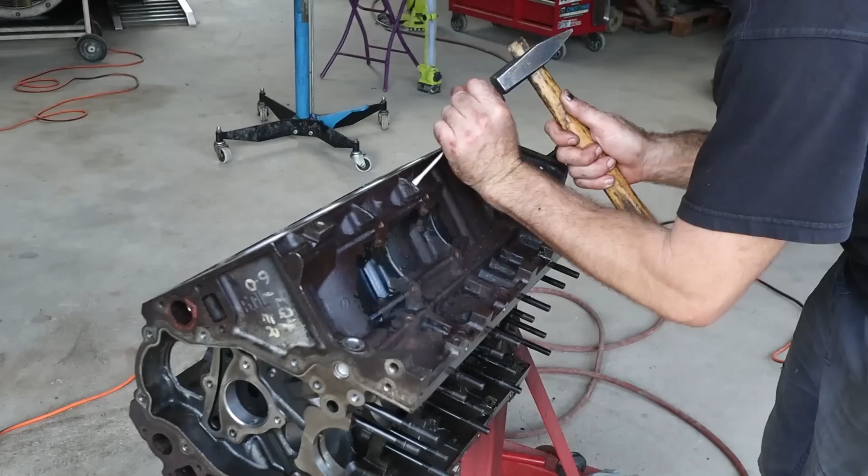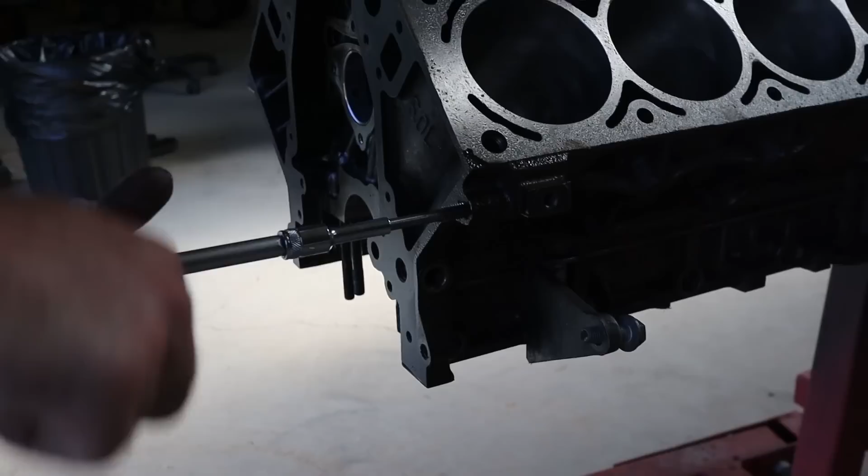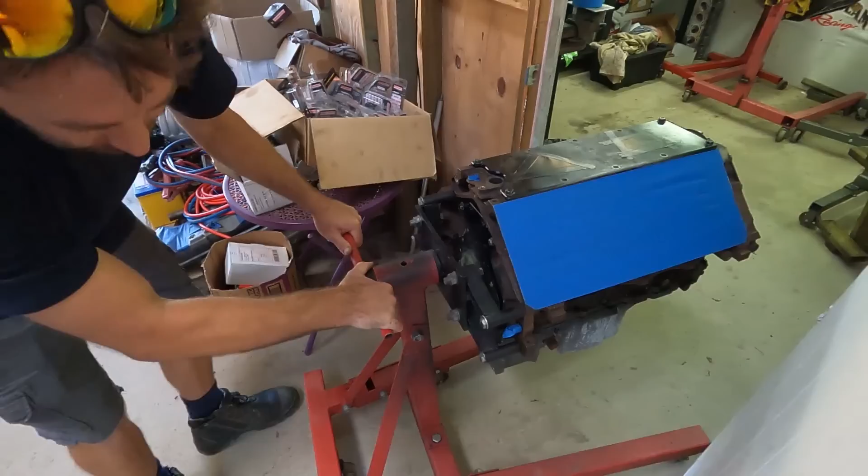Another iron block. Iron blockers. This one's destined eventually for some nitrous, maybe, some giggle gas.

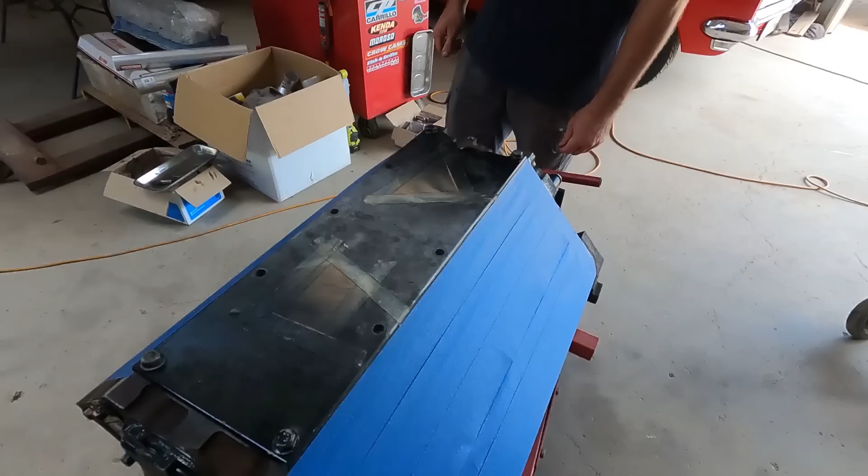Either way, to start with, this one's going to be like, what do we work out? 12.5-ish, high 12-ish to 1 compression. Big coat. 6 litre thing, be on E85, so it should make some pretty decent grunt. And it's got a monstrous cam for it.

Righto guys, welcome to our latest little build series. So this one, owner has a VX Clubsport. Yeah, I believe so. Yeah.

So VX Clubby, and he bought us just his engine, pulled down in parts, all of the parts he had set aside for this engine that he was going to build for this car, and he basically just wanted what he wanted. Now he already supplied a crank, rods and pistons.

They were Manly rods and pistons, crank. Eagle crank and rods, they're I-beam. Eagle I-beam rods, and it was Mahle pistons. So it's all stuff that we wouldn't normally pick or choose as our first preference to build an engine, and just LS1 block that came out of the car.

So what he wanted was pretty angry, big cammed LS nitrous on E85, and for what he wanted to do, the pistons that he had weren't really high enough compression to, as you guys know, we've harped on about it all the time, with E85 and LS in aspirated situations, it's not a huge advantage, and you don't get huge power gains because there's only so much compression you can get, well, in stock LS there's only so much compression you can get into them without upgrading pistons. So to go E85 and get any decent gains, you really need a really high compression.

But that was only problem number one. We actually sent the block down to start getting machined for all this stuff, and what had happened is the engine had let go at some point, and the rod had smashed the bottom of a bore and cracked the liner. So the block was sort of no good. It had to get new liners and stuff anyway. It was not the best thing for us to be using for a customer build.

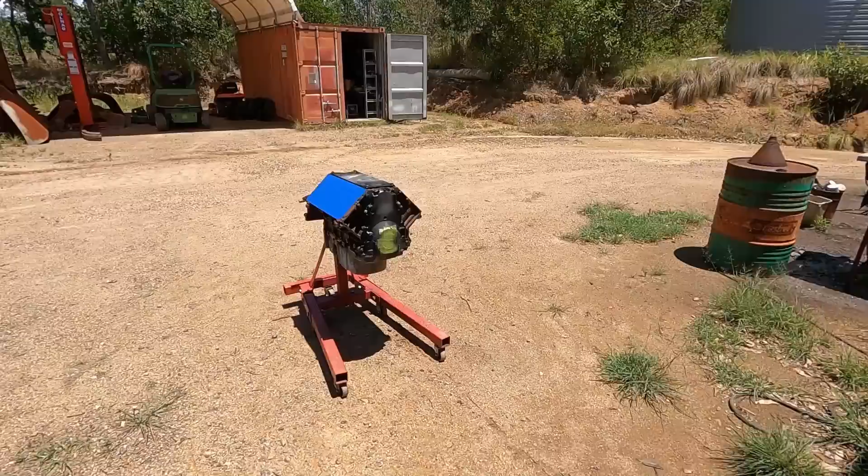Anyway, as you can see, Rex has got this block masked up and we're going to paint it up. First things first, paint her up.

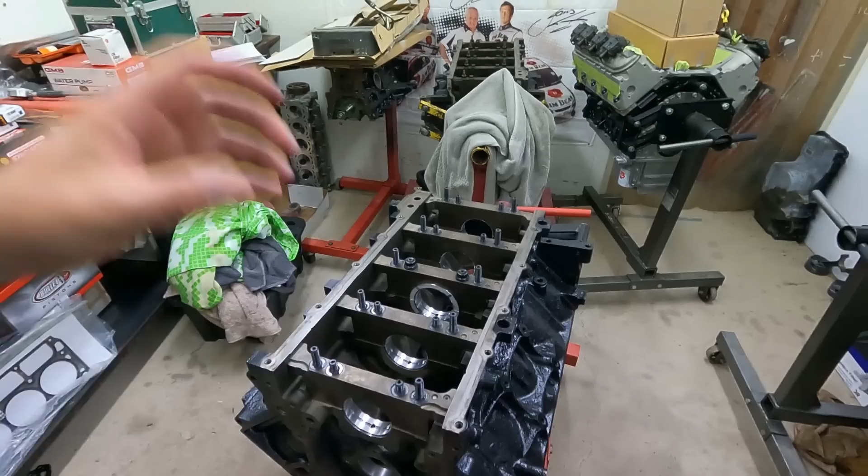Righto guys, Rex is cracking along with this engine, just getting the bearing clearances and everything else sorted. Interestingly enough, a lot of these came in a little too tight, so we've had to order some oversized bearings. A lot of bearing manufacturers make an oversize, one thou over, which is designed for high RPM, high performance engines. So we're going to have to get a set of those just because the standard size bearings come in a little too tight.

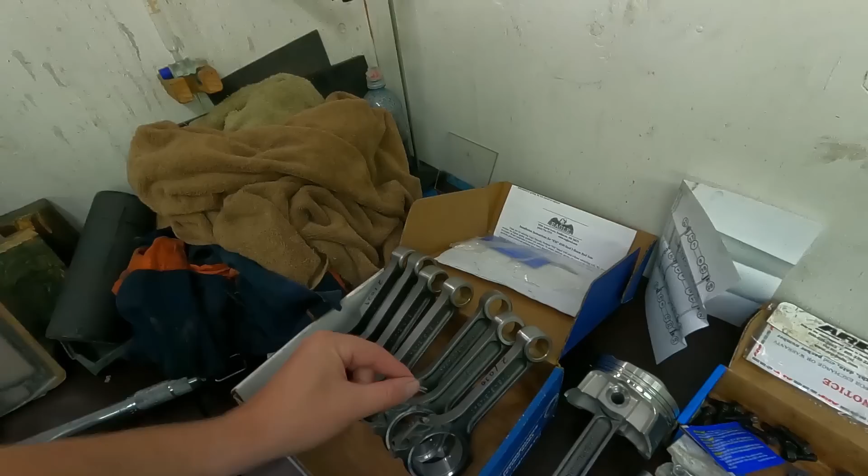So we've got our Eagle crank, Eagle rods. We've compared these Eagle rods to standard Gen 4 LS rods and they're almost identical - so similar, but you obviously have the advantage of huge screw caps, with ARP hardware, which you don't get with the LS rods, and you can't really use properly on an LS rod because they're a cracked cap. If you upgrade to ARP hardware, to be right you should be resizing the rod to suit the extra clamping force, but because they're a cracked cap you can't resize the rods. So it's a bit of a gray area - a lot of people just do it anyway, they whack ARP hardware in them. But to be right in the proper sense, you're supposed to resize the rod, and you can't. Anyway, they're a really nice rod. That said, they look identical to a Gen 4 LS rod, but they could be a bit thicker through the center of the I-beam. Either way, honestly not a bad rod for the money. Yeah, not bad at all.

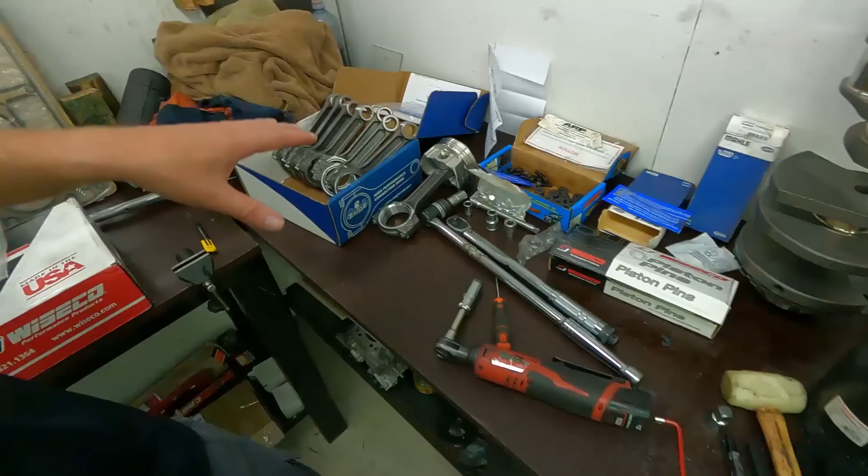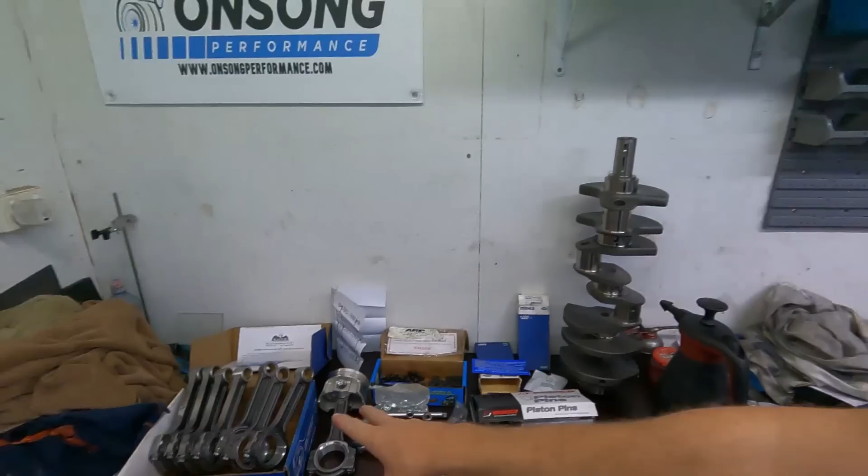These Wiseco pistons are actually quite nice, real nice. We ordered these to suit the compression we wanted in this engine, because we were going 6 litre. So the 5.7 pistons that were supplied are now going to be spares. Happy days, just waiting for new bearings to get in now, and then it can start going together. I think Rex will move on to ring gaps now. But apart from what you can see here - Gen 3 iron, Eagle rods, Eagle crank, Wiseco pistons, ARP hardware - yeah, all coming along sweet.

Everything's coming up Milhouse. So I'll just go through with you the cam that's going in this thing, because it is freaking monstrous. It's gonna be awesome.

Even though we've got these massive valve reliefs, Rex is still going to do a piston to valve check, because yeah, the valve reliefs are quite big, but with the size of this cam, we're still going to do some piston to valve checks. It's a real shame we couldn't get CNC ported heads for this engine, because I reckon they would have gone really well.

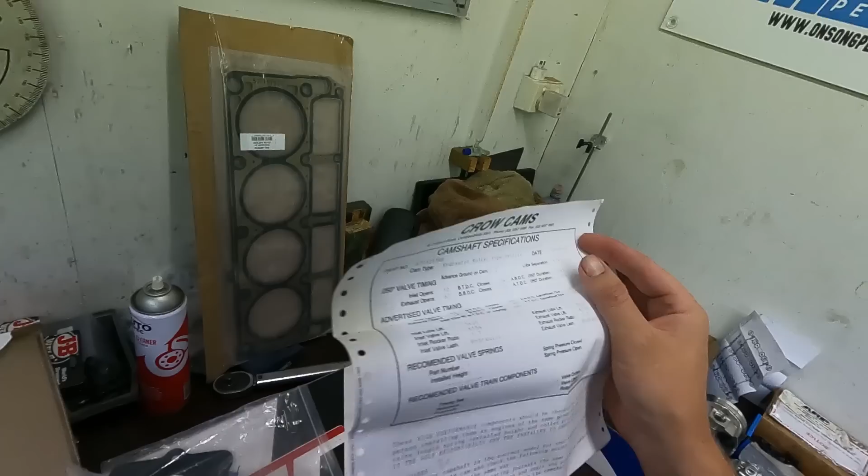But if you look down here at the cam, it's actually a Crow Cams 1253. Quite large. I'll show you the cam card. Let's have a look, eh? All right, Crow Cams 1253. So at 50 thou we've got 245, 262. It's on a 114 lobe separation, and for lift we've got 615 and 615 with our standard 1.7 ratio LS rockers. So yeah, quite an angry camshaft, big cam.

So Rex actually worked out that with that cam, the dynamic compression ends up coming down to like 8-point-something. So with this cam and these pistons, even though the static compression is going to be big - I can't even remember what we worked out - you could probably still run this engine on 98, because of this cam being so large and the dynamic compression being so low with it. But anyway, that doesn't matter because it's going on dedicated E85. That's why we went for so much compression. This thing's going to be monstrous.

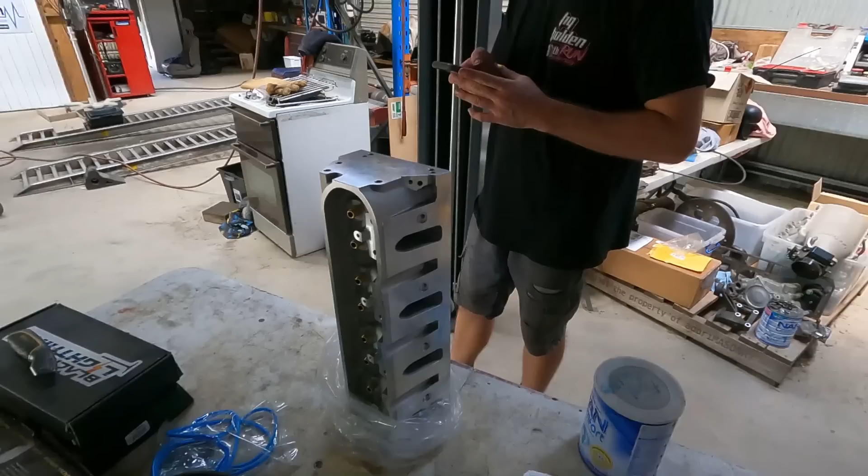So as well as that engine combination with this cam, it's going to have a Holley high-rise forward facing intake. I'll show you - these are his heads that I was talking about. Rex is just having a look now.

So yeah, they're aftermarket castings. They have no casting numbers, as you can see. So they're brand spanking new.

And yeah, unfortunately the guys down there at Tremaniac at Next Gen Engineering weren't comfortable running their CNC program through the heads, because they don't know how much meat they have on the port walls, which is completely fair enough. We totally understand that - it's not worth the risk of damaging the heads.

So what we've got is CalFlow Performance heads. They're meant to be the equivalent of a 243, which as we know flows a little bit better than a 241 does anyway. It would have been nice to have them CNC'd, but what do you do?

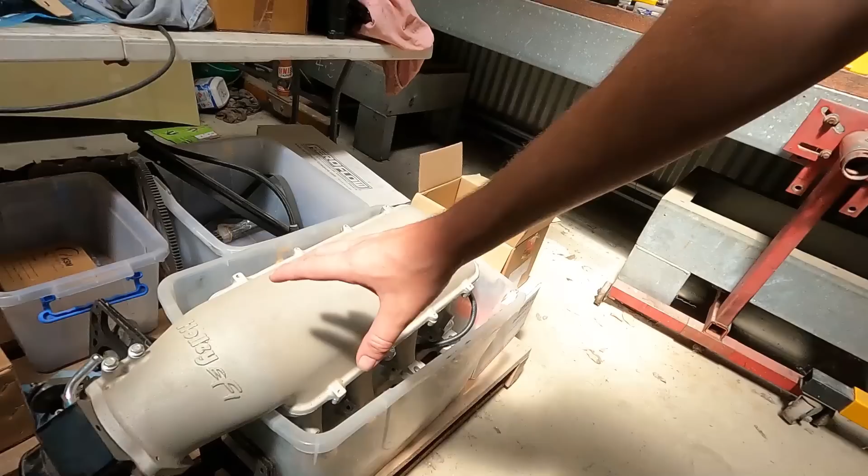So this is a Holley high-rise intake manifold. And yeah, these things are going to be sending a lot of 4L60s to the grave, I tell you that much. Plenty of 4L60s are going to get broken, so we'll see how long that lasts before he wants to go turbo 400.

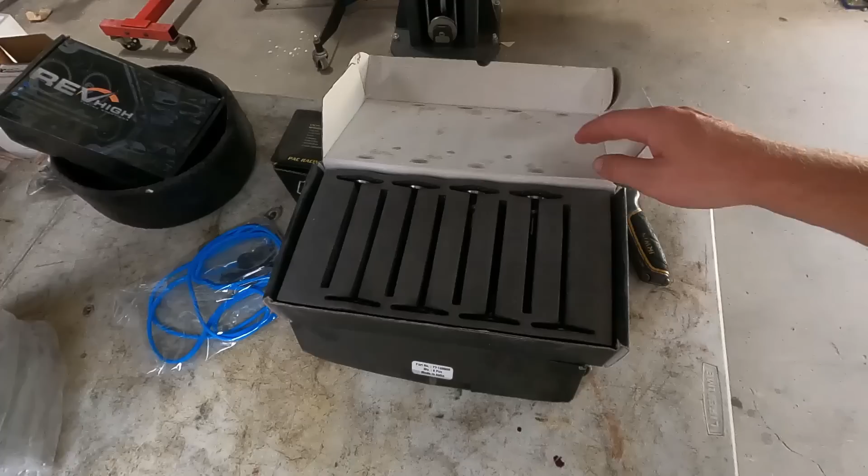So these are the valves that he supplied, which I don't know - we may end up doing like a 3-angle valve job on at the very least. But yeah, brand new valves there.

All right guys, cracking along here - see the heads are all cleaned up at the moment for now. We thought we had some more Prussian blue, but we've run out, so we're waiting for some of that to get here on Friday so we can check the contact on the valve and then do a 30-degree back cut or back grind on the intake valve. So we'll wait until that gets here to do that. Rex has just been doing some other clearancing and things like that while we wait.

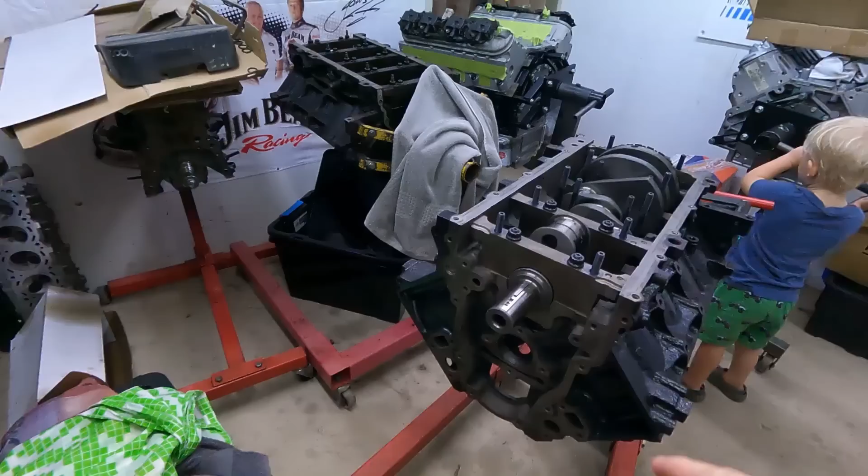Rex has degreed the cam in - it degreed in fine. He also did piston to valve checks, and yeah, plenty of clearance, a lot more than we had thought. Obviously with this monstrous cam, even though we had valve reliefs in the pistons, it was a better idea to check it anyway.

Sorry I wasn't here to actually film the process of those things happening. If anyone would like to know more about how we do that, there are multiple videos on the channel of how that process goes - a lot of engines that we actually fly cut to suit big cams on stock pistons. So if you want to go watch those videos, you'll get a really good idea of exactly how we do our piston to valve checks and everything else.

But anyway, this is all looking good. It should pretty much be at a point by the time our bearings get here that we need to finish doing the main clearances that are a bit tight with the new bearing shells, and just start assembling the whole thing. So, yee-haw, what do you reckon, Flynn?

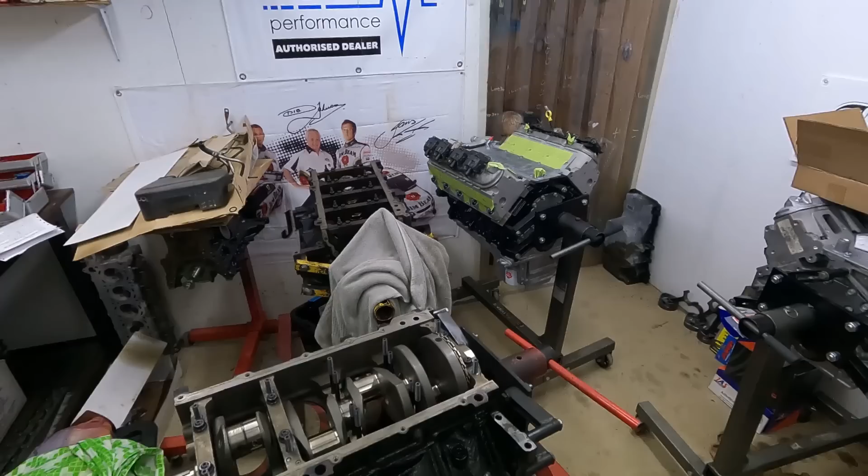Good job? Yeah, good job.

So what are you doing here? Washing stuff. Why, just like a dishwasher or something? Yeah, I just miss being home. That's what we need for the show. We need a dishwasher, chuck all the pistons in a dishwasher. Pistons, rods, cranks, the budget hot wash. Chuck the block in there. Yeah, pull all the shells out, chuck the block in.

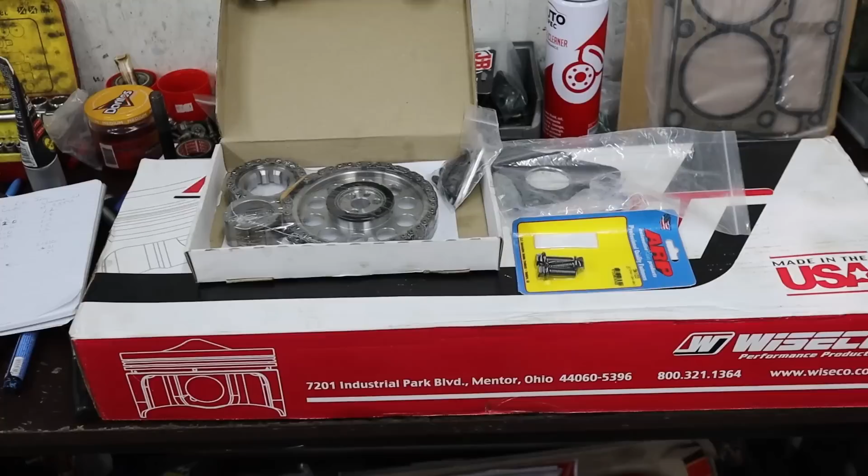What if I told you the thrill of running a red light, chasing a recent bright memory through a bent pipe? When you get older, some just wanna hang five with the rest of a soldier on, sleeping on the tram line. What's the point if we can't escape the landmine? Sand slides faster each day, one day we can die. We'll just ignore it, let the revs chant. I burn laps around the sun for face first to the campfire.

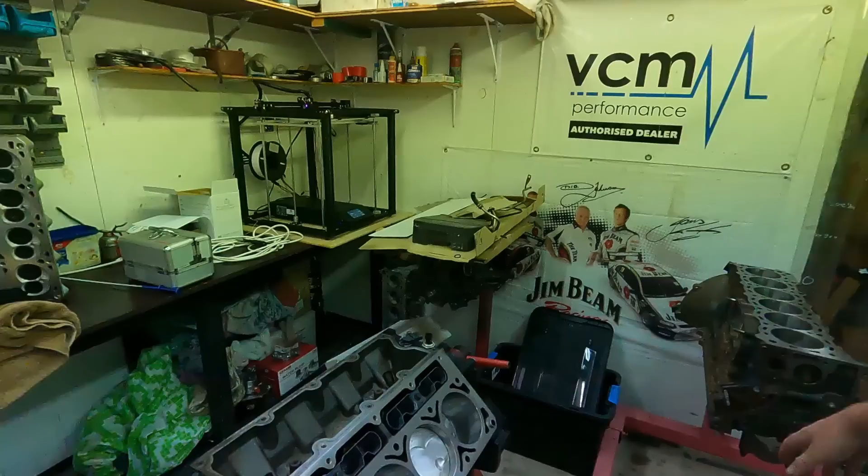Righto guys, still just working through getting this engine together, getting these heads together. We're not particularly that impressed with these heads. You can see where that spark plug actually ends up, that's actually in the head. So Rex has just put that in there so he can see a chamber, figure out what the chamber actually is so we can calculate the compression of this thing. Yeah, there's a lot of things about this head we're not particularly stoked on, so keep that in mind for this engine.

At the moment, obviously the customer just wants to get it together with what's here and get it in the car and get it running. But yeah, in future if he wants to do any upgrades, that's going to be the first thing we're going to be looking at, is swap out these aftermarket heads for a pair of CNC ported 243s or 799s or something. So that'll be the plan.

Righto guys, so engine is more or less together.

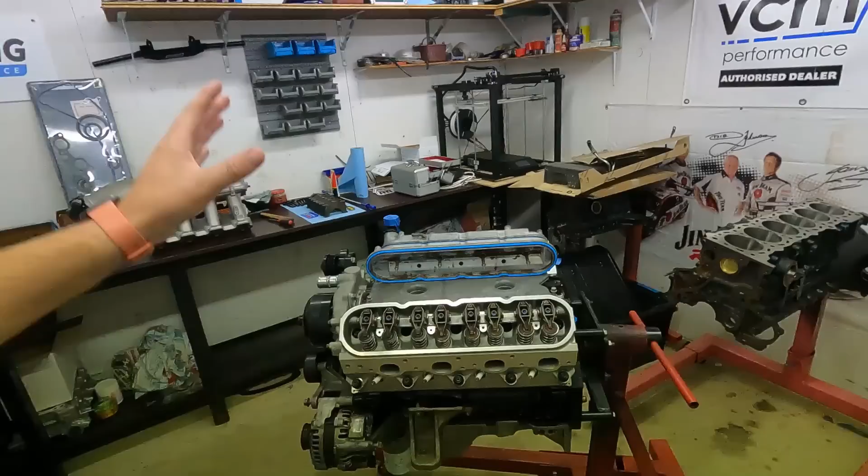I just thought I'd rip this cover off so I can give you a look at what's going on in here. Like I said a few times through this video, guys, a lot of the stuff we've used through this build is not stuff we'd normally get. A lot of it was customer supplied that we've tried to use as much as possible. There are a few things we just went ahead and didn't use, like we talked about.

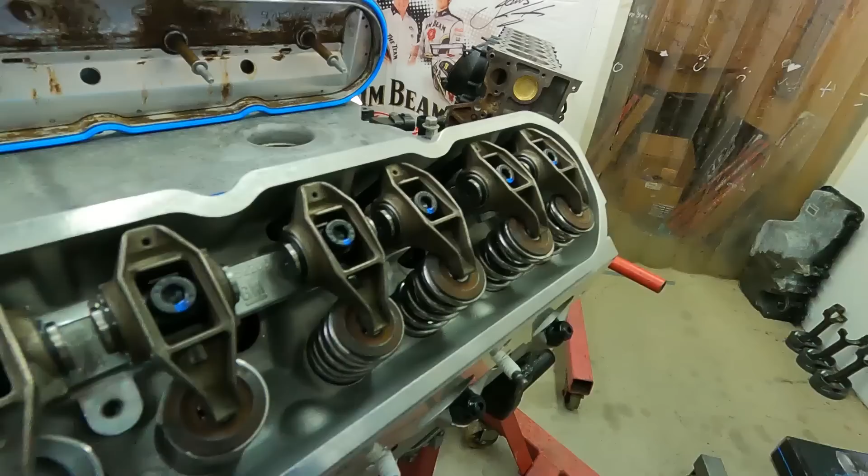But this trunnion kit is actually like a needle roller trunnion upgrade. It's called a Rev High trunnion kit. It doesn't seem to be too bad. We don't particularly like using needles - we usually go for the bronze bush type, like the CHE, just for the fact you have no issues having to worry about alignment. When it comes to needle rollers, there are a few issues trying to get things aligned properly, which is why we tend to stick to the CHE. But this seems to have gone together pretty well.

We had to do a bit of fighting with these heads to get them right, but at the end of the day it has all gone together. We are looking pretty good. I'll have to talk to Rex about what the final compression actually came out to and how this is looking, but yeah, it should go well in the Clubsport that it's going in. At this stage it's now just get the car here, get the engine in it, and start going with it. So we'll pick this back up when we have a car here to get this engine into.

Rightio, boys and girls, so the big 6 litre is just about ready to go in the car. We've been playing around with the manifolds and stuff. The car has been dropped off. We do have the car here now. I will show you the car.

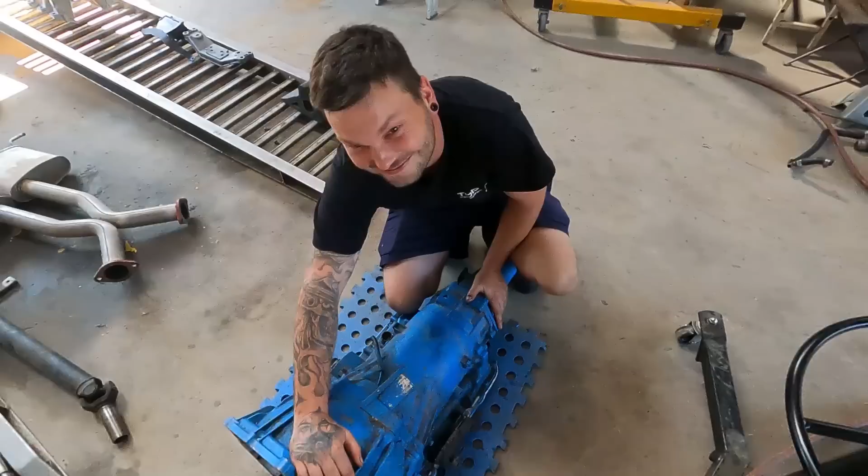Boom. It's a red VT Clubby on some Bud Simmons. These boys are having fun. So the car was dropped off yesterday.

So far we've been going through trying to figure out - obviously it's another one of those things where the car was pulled apart before we got it. We didn't pull it apart, so we had to go through and figure out what was here, what was missing, what we need to chase up. The other thing is the owner wants to convert the radiator and everything all to VZ so he can remove the expansion tank and just have an overflow bottle. It's much tidier in the engine bay to do that.

He's got coil relocation brackets, so I've been trying to figure out where we can mount the coils, what we can do with those. He dropped off a heap of other stuff with the car to get it sorted - the exhaust that was on the car, the gearbox, the converter, tail shaft, cross member. Most of the stuff's here. There's a few things we've got to try and piece together and work out, and we've ordered a heap of stuff this morning. So that's pretty much what we've been going through.

He's got the VZ radiator there. So yeah, it's been a lot of work just to sort of figure out what exactly this thing needs and what we need to buy to make it all work the way he wants. So first off the bat, he's just got some HSV headers with some stock cats, and they're 2 1/4 inch - like they're 4:1 to 2 1/4 and 2 1/4 stock cats, and it's just not going to cut it for what this thing's going to do.

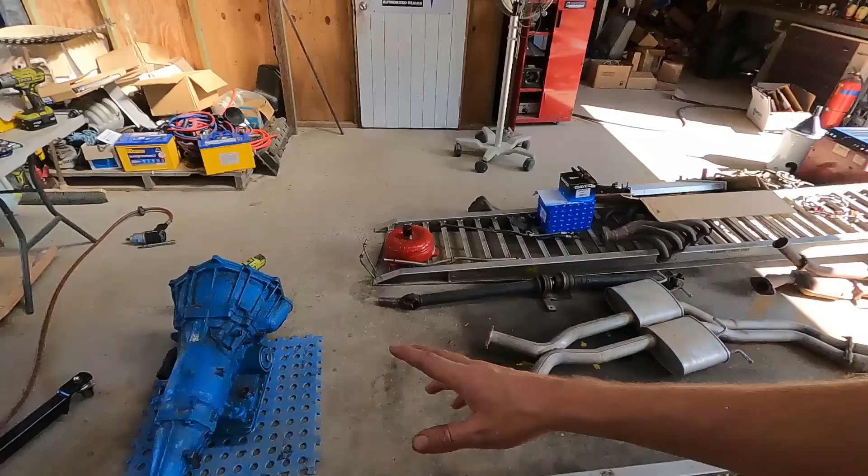So we're trying to get on to Black Ops Performance, who built the exhaust that's on my Statesman. We absolutely love the sound of that exhaust, and we would really, really like to put one of those systems on this car, so we're trying to get on to order one of those. The gearbox is supposedly meant to be a built 4L60. We don't expect it to last long. The owner's all across the fact that he doesn't expect it to last long, particularly with the way he drives. But we've just got to a point where it's time to start getting the box and motor into the car.

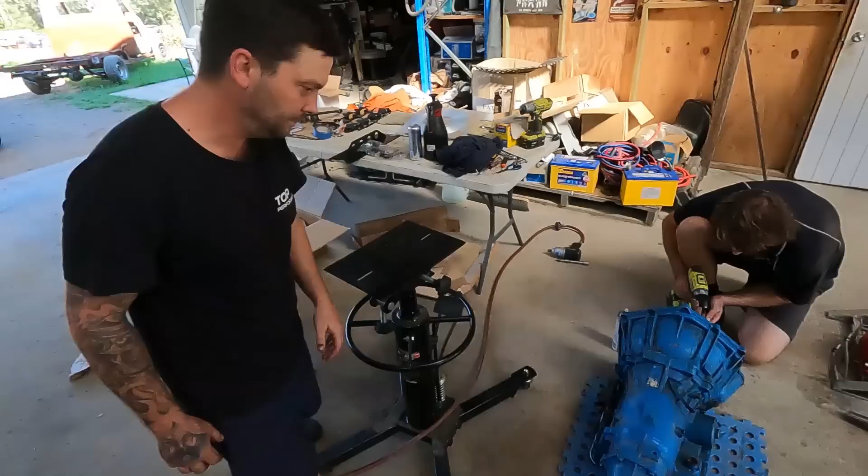We've worked done enough with the engine bay and the shell that it's time for the motor and box to go in, so that we can start working around that and continuing on the project.

But because the gearbox, we don't know how long it's been sitting for, we don't know who built it or who did it. It had no dipstick and nothing plugging the dipstick hole, so we wanted to check the pan and make sure the oil was clean before it went in the car. Rex straight up found a heap of swarf in the input shaft seal.

This is what came out of the input shaft seal. If you look behind it, because the seal seals on the converter snout, there's plenty of room you can see inside. The bush that holds the snout of the converter, and that it runs on to drive the pump, is cooked. That's where the swarf came from. That bush is already wrecked.

So that's not a good start for this thing. We needed to get the seal out to have a good look at what that bush is doing and pull it out, but unfortunately to do that you've got to get the bell housing off.

We went to get the bell housing off, and the bolts were done up to about 120 million foot-pounds, and one of them stripped the head. So now the boys are having fun trying to get the bell housing off the gearbox so we can properly inspect that bush, figure out what's going on, and get it sorted so we can get this thing in the car.

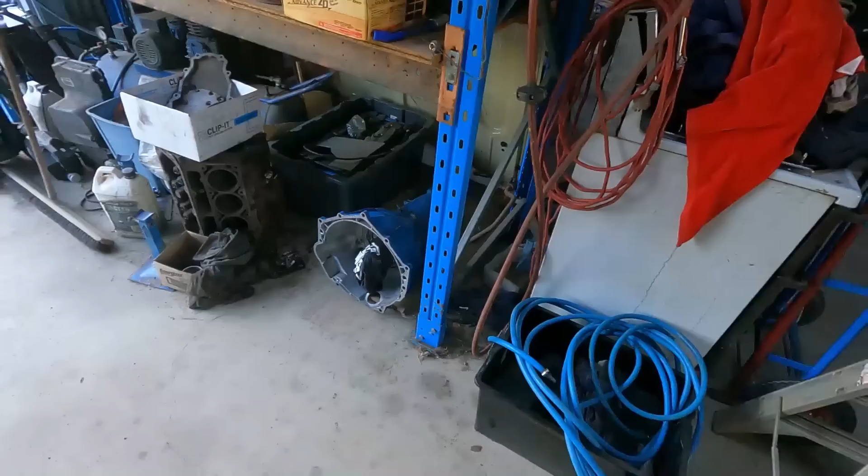Right, so confirmed, the bush is cooked, absolutely cooked. So we ordered a new bush and seal, but it's going to be a few days, which means we can't get this in the car ASAP.

So it's already gone back out undercover, and we've already got started on the next thing, which is the VF. We've done our pre-runs, and we'll pull the motor out of that, then continue on with the Clubby once we get those parts back and get that 4L60 sorted.

Right, so we've got the Clubby back inside, take two, after receiving the parts for the gearbox we purchased, which we were hoping would fix our issues so we could continue getting the car together.

We've also ordered a new exhaust system, which will be here soon as well. So a lot of exciting stuff going on with this Clubsport, but this next bit, not so much exciting.

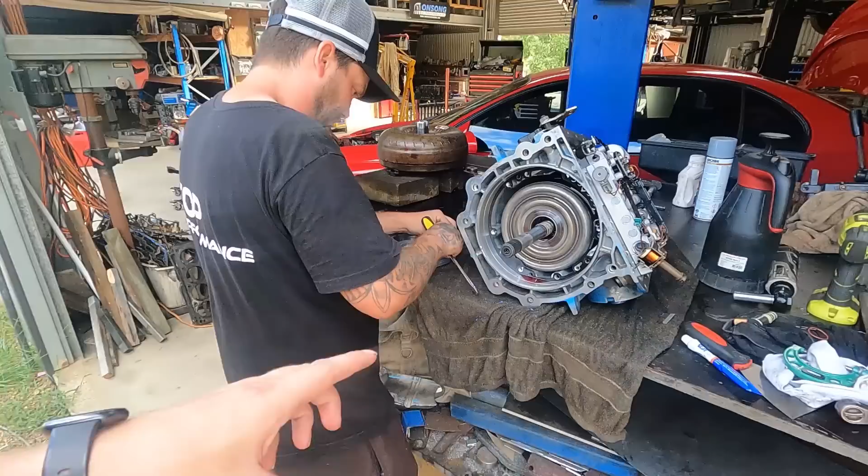We started digging into exactly what was going on with this bush, why it was damaged, and what Rex has sort of found. As you can see, this is about not where you want to be on a 4L60 when you're supposed to be getting it in the car.

What Rex has found is that the converter that's been supplied is actually damaged, so the snout drive, the snouts, that engage it.

They call it the snout. Yeah, the snout, yeah. Is that what they actually call it? Yep, that's what Lindsay called it when I was talking to him on the phone before. Nice, well there you go, learn something new every day.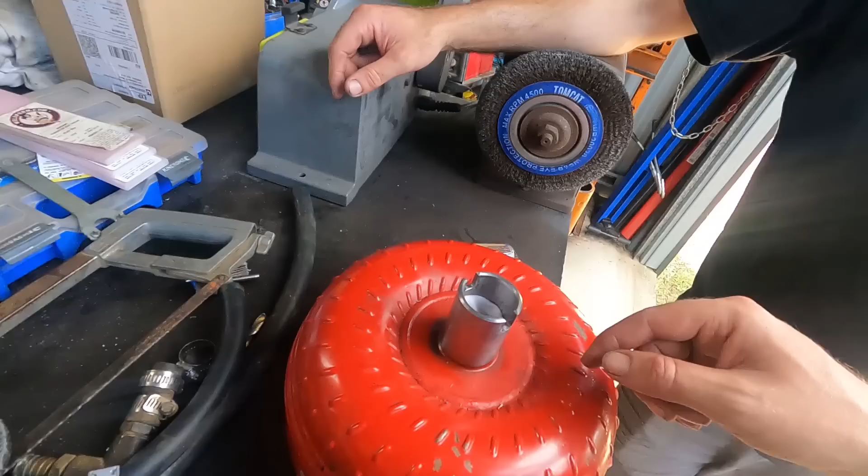Regardless, where this is meant to engage the pump and drive the pump is actually damaged. We've done some measuring, it's not round, so it's somehow been damaged at some point, and this is what damaged that bush in the gearbox. Someone was trying to force this converter in there, and because it's out of round and it's got some sharp bits on it, it basically just chewed the crap out of it. Trying to twist it to get it to go in, and those sharp edges have just chewed the heck out of it.

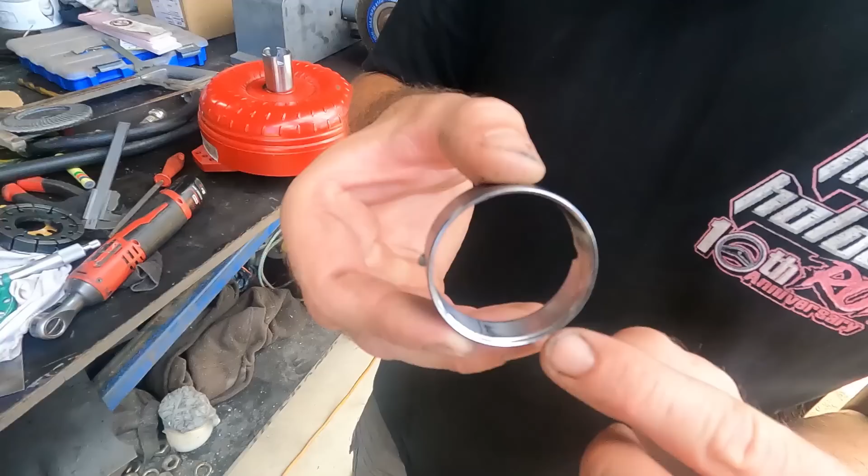Where is that bush, Bo? Now that it's out, you can sort of see. So yeah, that was the back side, but you can see that was what we could see, and all that swarf that we found was from that front lip, and you can see that's what someone's tried to force it in and been doing the old twisteroo.

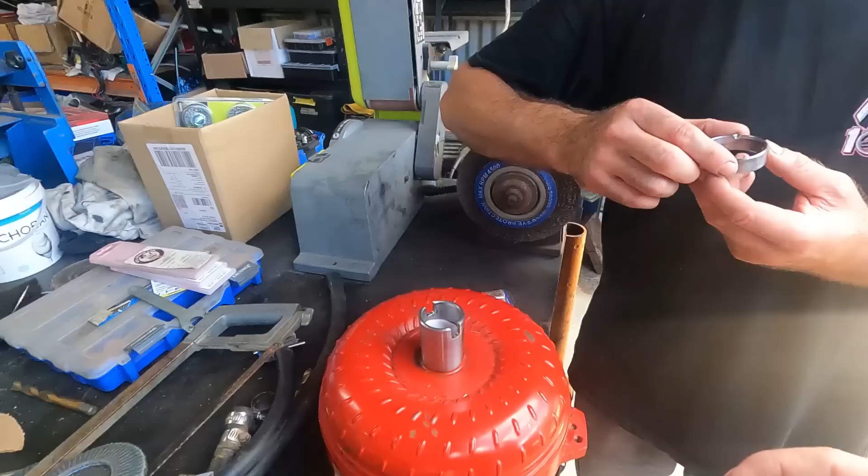Yeah, it's a bit of an odd one. No idea how this would have got damaged like that. That's why I said to Bo, I haven't come across this problem before. I mean, I don't know, if a pump seized, could be something stupid, like someone's dropped it. I don't know, who knows? Either way, not good, not going to work.

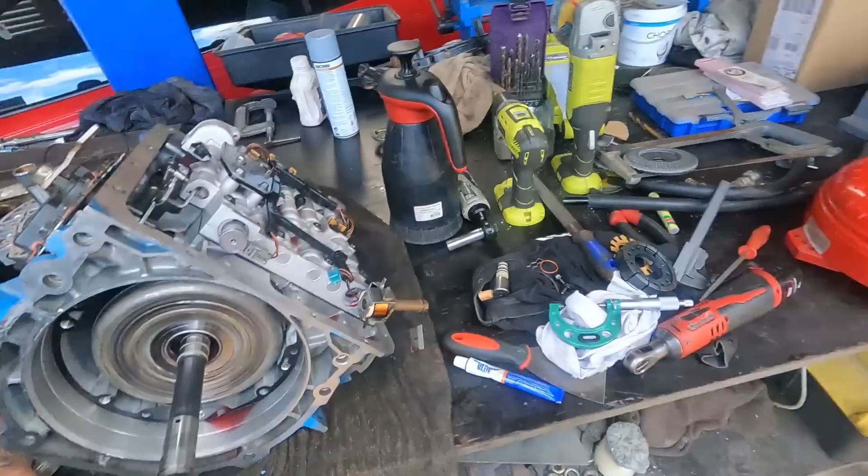It's not going to fit, which means that this isn't what you want, and it means that it delays the red car even further again, which means we pushed it inside for nothing. Well, I can still do the fuel system and some other bits, but yeah, it's...

Boy, so yeah, very, very frustrating, because you know this delays other cars that were meant to be getting done. These delays knock on because of our situation, our working conditions. But anyway, it is what it is, just dealing the best with what we got.

But how's Bo here, just rebuilding a gearbox casually? Is there anything you can't do, mate? Oh, anything with wood, no carpenter, that's for sure. No carpenter. Yeah, oh well.

We freaking are, nothing ever just works. No, nothing's ever simple, nothing's ever easy. Anyway, it's just frustrating, one of those things that, you know, it's not really foreseeable.

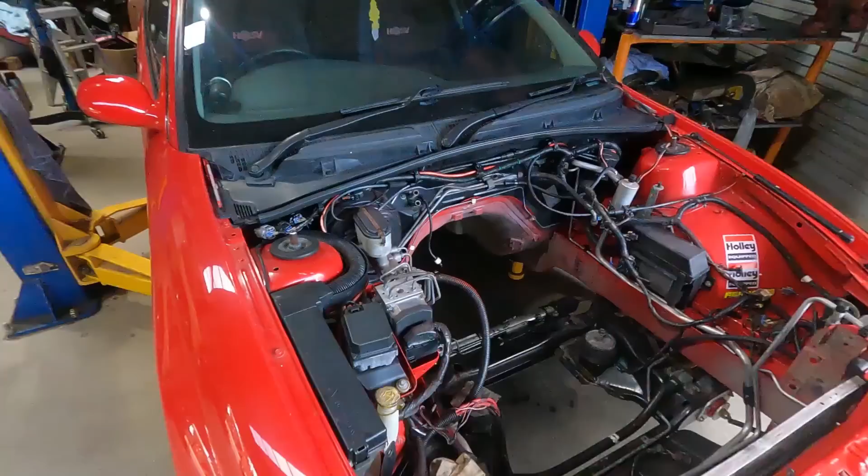Rightio guys, so the deal is the converter's getting fixed. I'm not sure if we covered that in the last little clip, but the converter is getting fixed. The boys have been smacking on through, continuing with what we can, which would be the fuel system.

Have a look at this beautiful piece of art Rex has done. So all hard lines, one of these, you've seen these in just about every car we put a fuel system in, gets one of these. That's just so good. So yeah, all hard lines, filter, reusable filter, reg at the back here, so it's deadhead from here up.

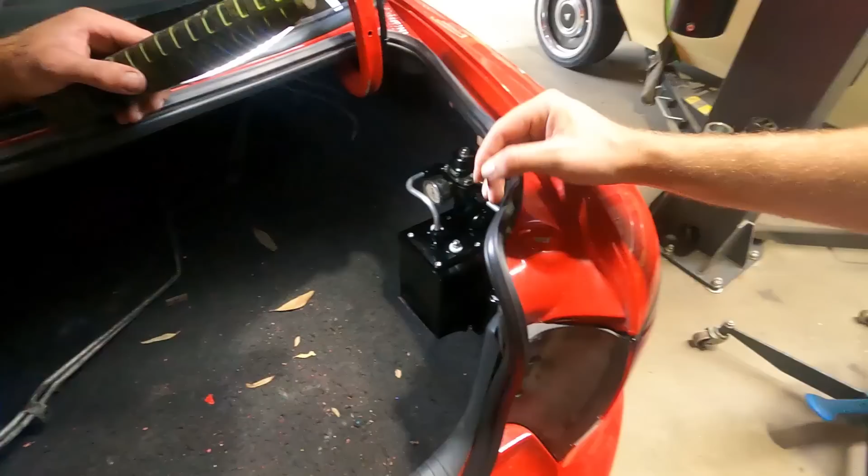And yeah, what fuel pump ended up in this one? Just a 540 or 525. 525, yep, whatever the Walbro is - the TI, sorry, TI Automotive, yep. Same fuel pump we're using. Yep, so it'll be a big dog, E85, lots of pump for some spicy future stuff.

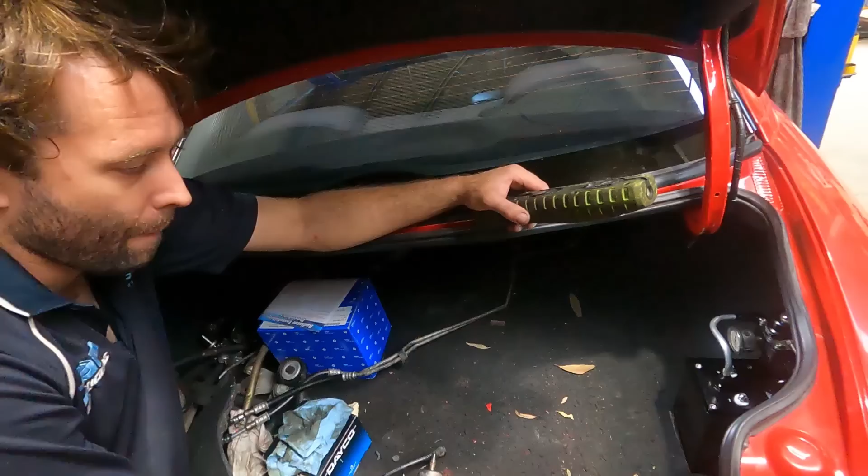So yeah, fuel system's just about ready. Yeah, I'm really, really happy with how that came out. It's awesome, I love doing stuff like that. This looks sick. Oh well, should now be good, can move on to doing it on that one.

Yeah, alright, big 6 litre back out of the engine room. So we have finally got our torque converter back, it has been fixed. Big thank you to our people down there at As New Transmissions Products in Salisbury, but it should be sorted out, ready to go in the gearbox.

I'm going to test fit that in a minute, make sure it's all sorted. So hopefully our converter's sorted, which means we can finally get this car together. Third time lucky, third time's the charm. Third go at getting this all in the car, hopefully we'll be right.

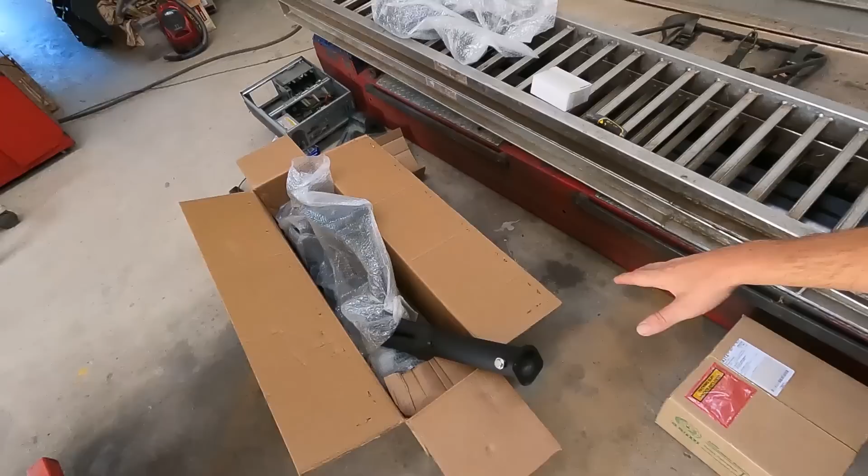At the moment we've got our new Black Ops Performance exhaust system. You guys know I had one of these on my WK Statesman and I absolutely loved how it sounded. It sounded so good. This system is slightly different to the one I had on the Statesman, just because of what we could get hold of and what they had in stock. So it's not exactly the same, but still really excited to be putting a Black Ops system on this car, because I really, really like how they sound. Very unique sounding. With this thing being so high comp on E85 with this exhaust, I really think this Club Sport's going to sound very unique, just like the Statesman did, and I'm excited. I'm here for it.

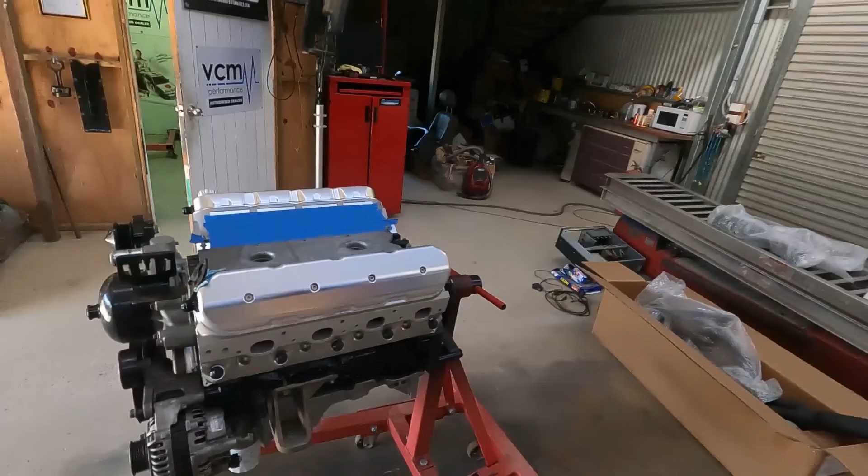So anyway, first thing we're gonna do is double check our fitment on these heads with the headers. We're just gonna fit the headers up and make sure there's no issues with fitment as far as getting plugs and plug leads and plug lead boots on them.

These heads have been a little bit funny, and on the last full exhaust system we did on that VF, we had some issues with plug boot leads. That was a different brand. Not that I particularly think anything like that is brand specific, it's literally just mass produced aftermarket products. There are fitment issues, it just happens. It's not bad mouthing any brands or anything, it just literally happens. It's just a consequence of mass-produced products.

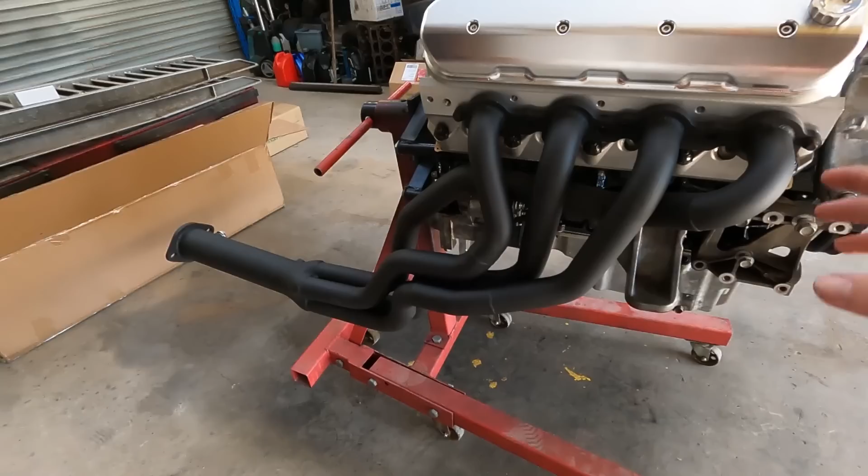Ooh, look at that, real nice. So these are the same headers that I had on the Statesman, and I think that is what gave it that unique sound. They're 1 7/8, 4-into-1 long tube, but they're actually mild steel, not a stainless header. They're a mild steel, like a pacemaker or similar. I really think they give it that really deep, throaty note, whereas stainless, being such a harder material, gives you a lot more of that tinny, raspy sort of sound. So I'm pretty sure what ended up happening is we were able to get the mild steel headers, but I think the exhaust might have ended up being stainless just because they didn't have any mild in stock, I think. I'll have to go back and double check what the order was, because it was ordered a fair while ago now. But yeah, look how good they look there.

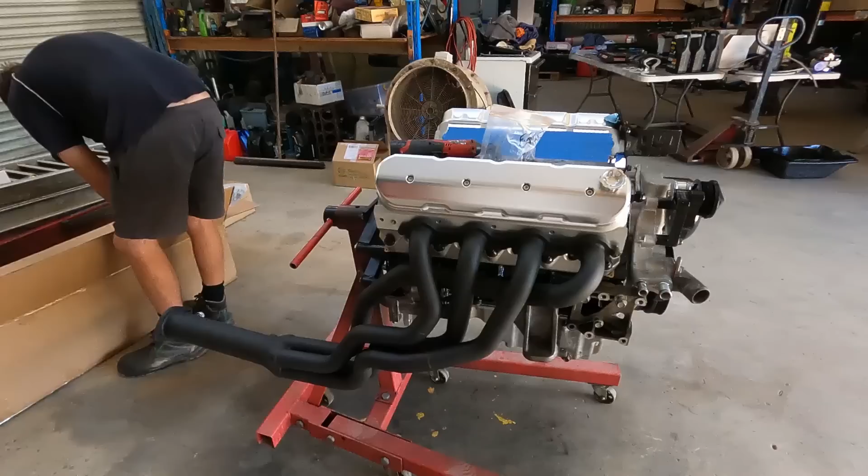So big ups to Black Ops Performance. These covers as well are from Tremaniac Racing, so huge thanks to our boys out at Tremaniac. These are really well priced covers. Most aftermarket CNC, like billet valve covers for LSs, are really expensive, but these ones from Tremaniac are actually really reasonably priced. This is the first set we've used, and we are really happy with them. This thing just looks hot.

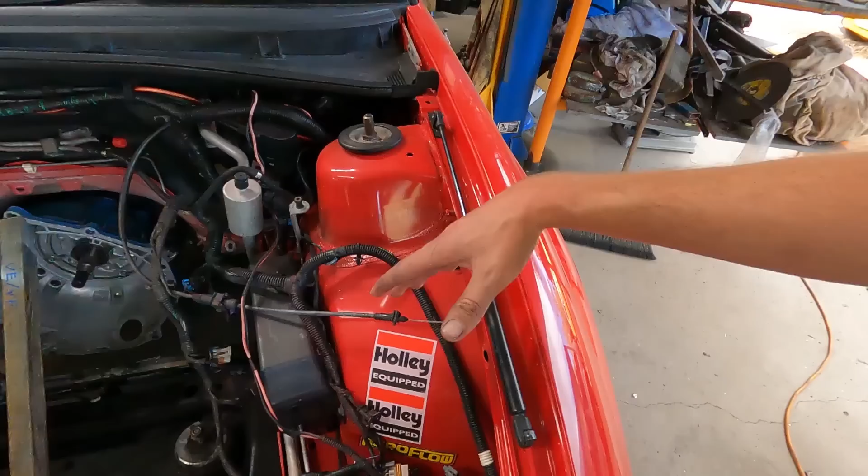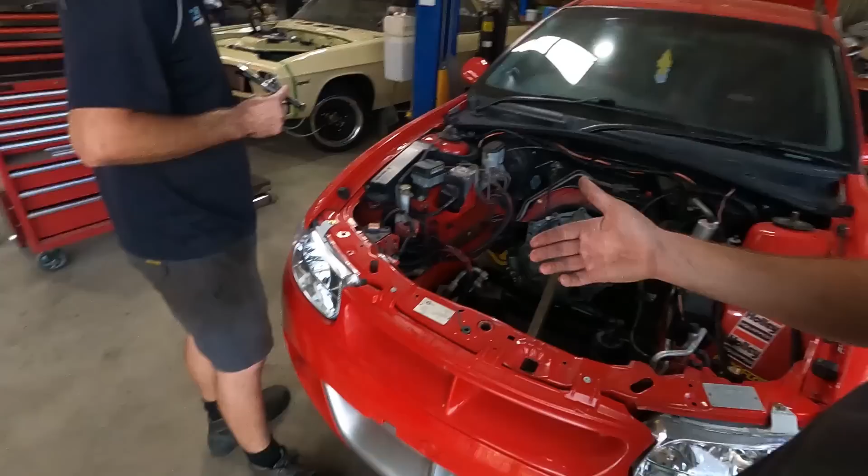They're good. The owner wants to go, or has, as you can see, bought a full VZ radiator, wants to go all VZ radiator and everything to basically hide out the engine bay a fair bit. Your VT to VY have a header tank, an expansion tank, and the VZ does not. It does make the engine bay quite a bit tidier, not having that up on the side. But obviously without the expansion tank, you need a radiator that actually has a pressure cap, which the VZ does. Or I think so, it will. So anyway, that's why you got to go VZ, like everything, to remove it.

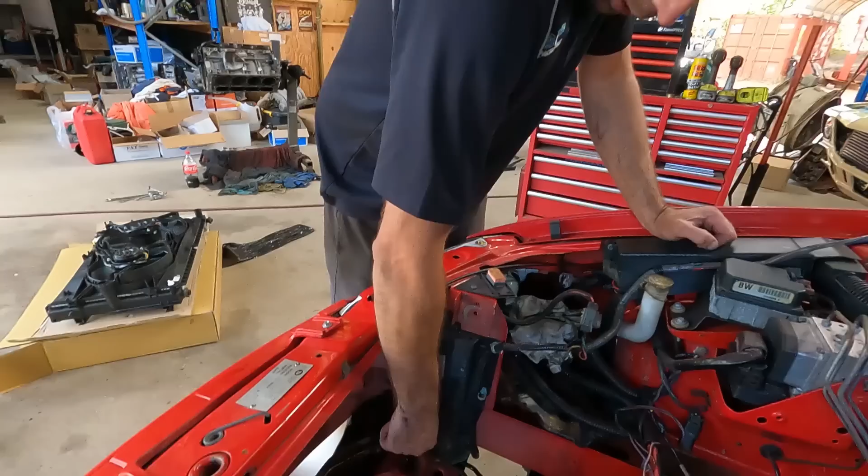But there actually is quite a few more differences than we were expecting, and Rex has just sort of worked out how it's all going to fit and work. The way the condensers mount is completely different. The early VTs, VT-VX, had the rubber donuts here, the feet on the bottom of the condenser, and just the rubber brackets there. The radiator just pushes against it.

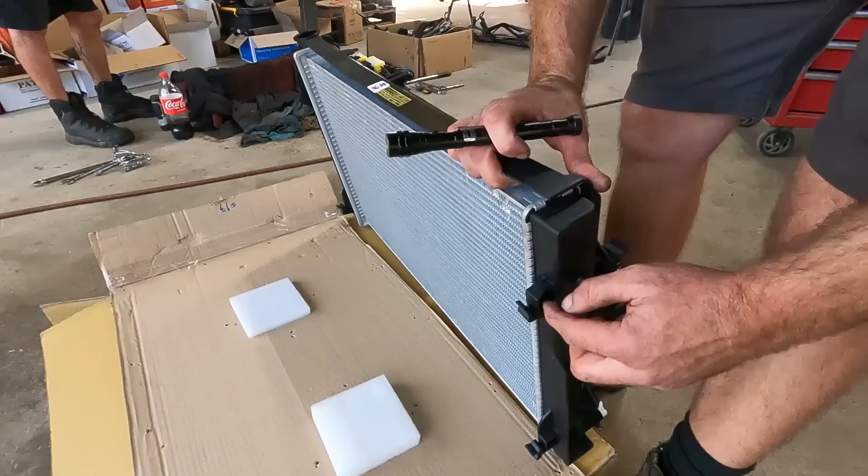In the VY, it's the same condenser as far as I can tell, but it has brackets on the side that bolt and slot into those brackets on the other side of the VZ rad. The VY is actually the same, and the VY keeps this line, except there's a soft bit from there to there.

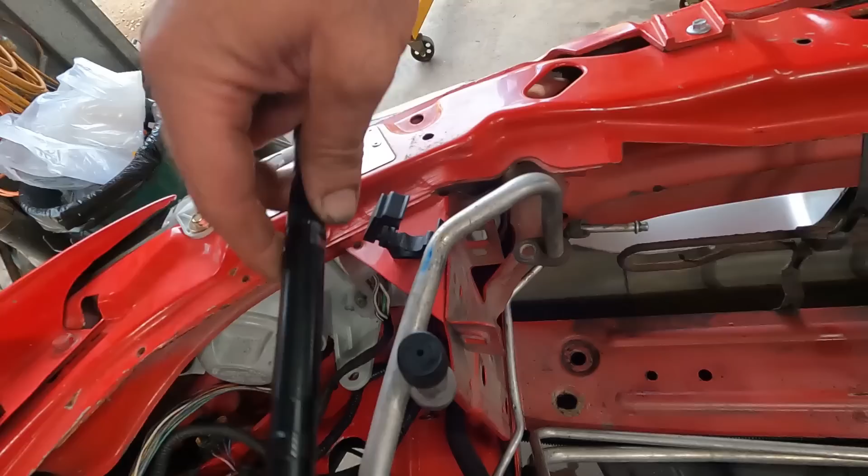That's all right, we can do that because the radiator hose is actually different on the VZ, so we'll have to bend that out of the way. The VZ condenser was different though, that inlet at the top is actually a horizontal one that goes out and turns around, as far as I can see.

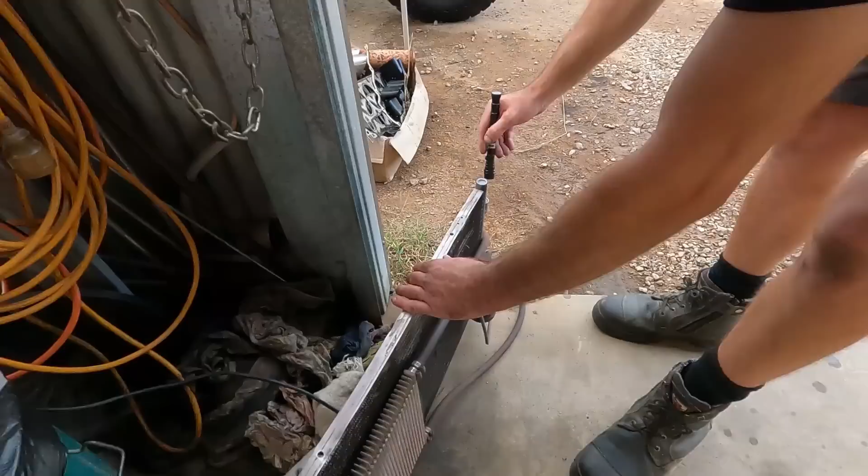So it was a bit of a head fuck to figure out which condenser we actually need for this setup. I'm pretty sure a VY one will work because it's got this port in the same spot, slightly different though, around the front here, because this condenser moves back since it clips into the radiator now instead of sitting forward. So that port on the condenser comes around the front.

I think that's how it's all going to work. Then there's just a little bit of massaging to get that out of the way, and these lines hit that bottom outlet, so I'm just going to bend them down. Other than that, it should be all good.

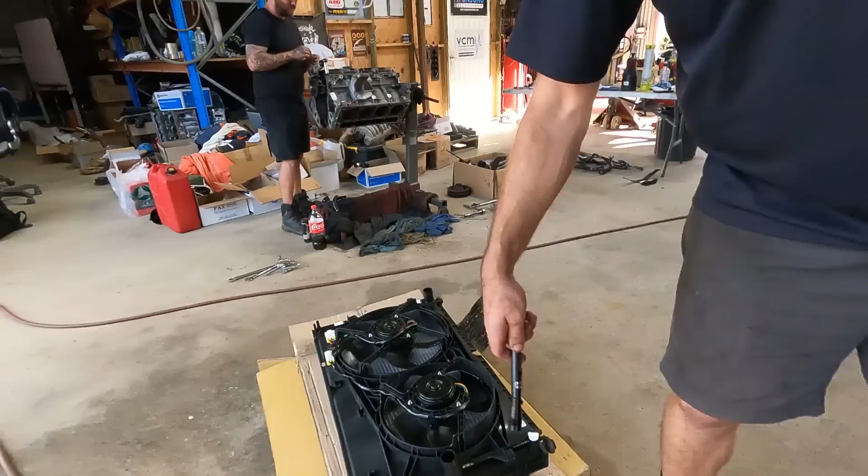So then, as you're aware, VZ needs VZ hoses because they're completely different, and a VZ overflow bottle, which we have, should bolt up underneath. It should just bolt straight in because, what did we work out, that the early V6 in this model had the overflow. So everything's there, you just bolt it in, and the filler neck sticks up there.

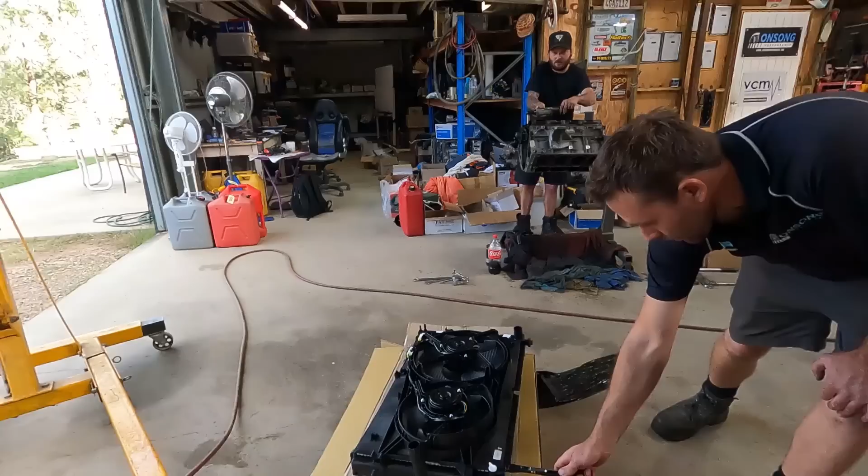So I did have to make some adjustments to the holes to get the radiator to sit right, though. Seems like the center distance between that and that is slightly wider on the VZ, so you do have to do a little bit of attitude adjustment to make it fit.

Then we've got the next problem, which is going to be later: the VZ has a six pin plug, different to the way these other ones were wired. It's not too much of a problem anyway, because as you can see, someone's gone and butchered this wiring, so we're going to need to fix it anyway. It's probably not that much harder just to rewire it to suit the VZ fans and be done with it.

So yeah, a bit of fucking around, but it'll work. There's actually a fair bit of work in converting to all this VZ stuff. It's not as simple as just buying the VZ stuff and chucking it in.

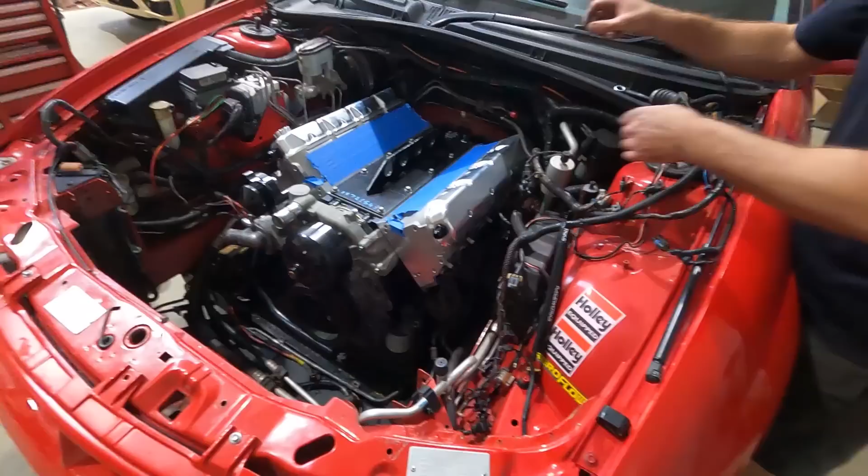Oh, look at that. That looks bloody hot. I like it, shit hot mate. I really like these covers, I'll start putting them on everything.

Alright, so the boys are cracking on with this, getting it together. One thing we've been worried about from the very beginning was a solution for an intake. Because it's got the Holley high rise, we'd really ideally like to put an OTR on it, but the Holley high rise is so much higher than a stock manifold that your general VCM OTRs and stuff just don't fit. There's not really any way to make them work.

So there are options where we could put another airbox on it off some different cars, which we'll talk about later. But before we commit to buying one of those, I wanted to try and have a go, basically starting with what the VCM OTR is, and try to modify and develop something that would work. Because these are a very popular manifold, if we could build an OTR to suit these cars -- the VCM ones are fairly generically universal to fit Commodores, but don't fit them with these intake manifolds -- that would be really, really handy.

So I just downloaded an app on my phone, which is meant to be like a 3D scan app, and I've tried to give it a scan. So we'll just wait to see how that comes back. Hopefully it comes back okay.

It doesn't have to be perfect. We just need to be able to base some critical dimensions off what this is, and hopefully be able to modify it in Fusion and potentially print our own OTR to suit, which would be really, really cool if we could do that. Obviously it's going to have to be in multiple pieces because our print bed is not big enough to print a whole OTR like that, but that's fine. It can be a split design that bolts together. That'd be fine for us as well.

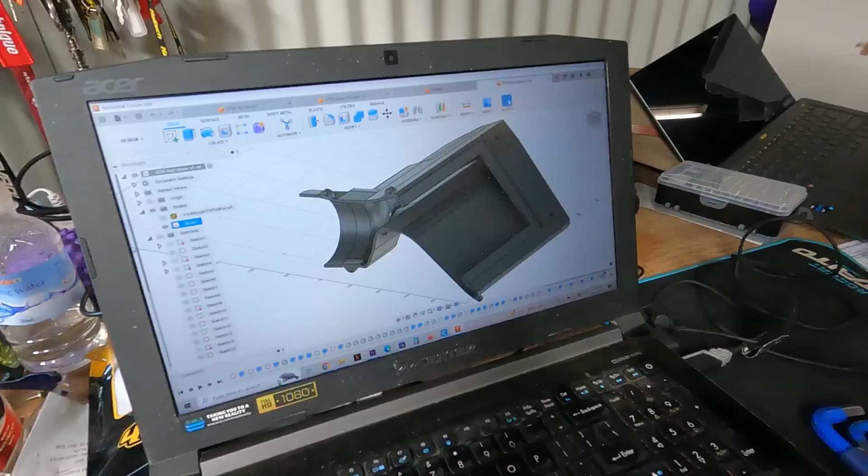All right guys, pretty exciting stuff, I must admit. This has gotten out of hand pretty quick, and what a steep learning curve this has been. This has not been an easy part to draw, but regardless, about 3 hours, and I've managed to get this done, which honestly, I don't want to toot my own horn too much, but I'm very impressed. And if this works out, that's just ridiculous, and it's ridiculously cool, and I'm very, very happy about it.

So anyway, I downloaded an app called, what was it called, Trinio, T-R-N-I-O, and that allows you to do like a 3D scan. So I scanned the old VCM, managed to export it and get it into Fusion, and start from there as a bit of a base, scale it correctly, all the rest.

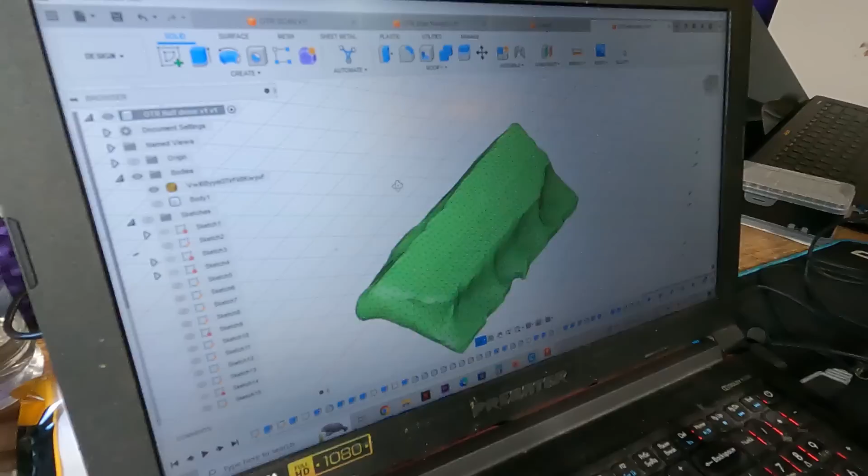Hold on, I'm just trying to get this sorted out. So this is what it looks like when you scanned it, when it's been scanned and into there. Pretty good idea of just the shape and the general critical dimensions.

And then from there you start sketching and getting your right dimensions and stuff, and starting to actually extrude what's going to be the piece. And from all of that, I ended up with this.

So obviously because of our print bed, we'd have to print half at a time and then join them together. So this is basically version 1. There may be a lot of modifications to do to this to make it better, but at least it's somewhere to start from.

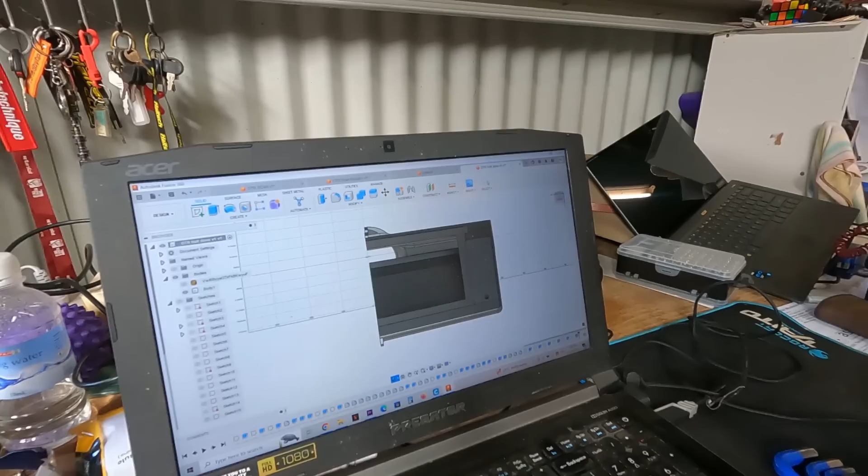And I've designed it to work with the same filter element as the VCM one. I haven't checked, but I assume that you should be able to buy replacement filters for your VCM OTR. So I thought it makes most sense just to build to suit that filter element, because we should be able to just buy one. So that's your half.

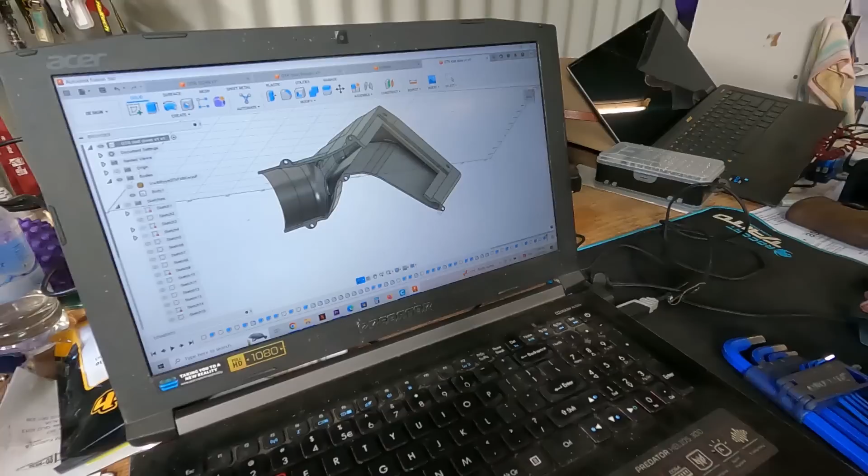Basically, print that, mirror it, print it again, and then bolt it together. You've got 5 bolts to bolt it together, and your 4-inch outlet.

So yeah, happy days. If you compare it to this one, you can see the difference in the angle of the intake, where it sits compared to where the VCM one does. So the idea is obviously that it points up much closer to our high-rise manifold.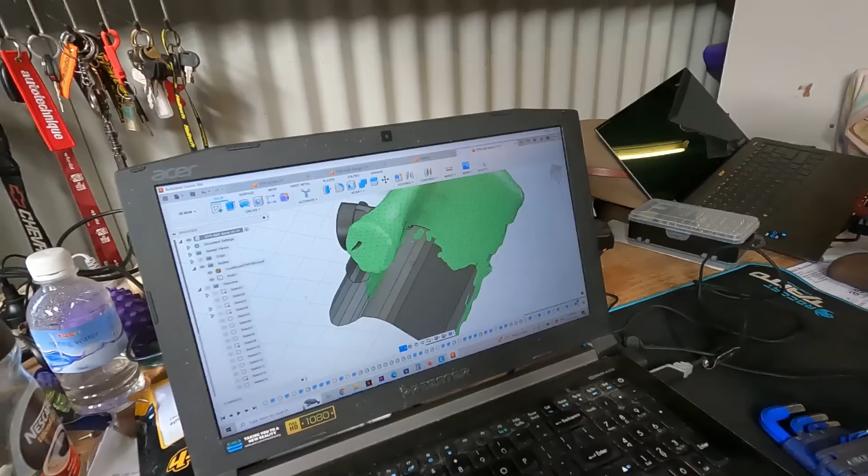But might get this pretty much ready for print. Obviously it's not the prettiest, as you can see. It's definitely not the best piece around. It's not the best looking, etc, etc. But like I said, I'm new to this.

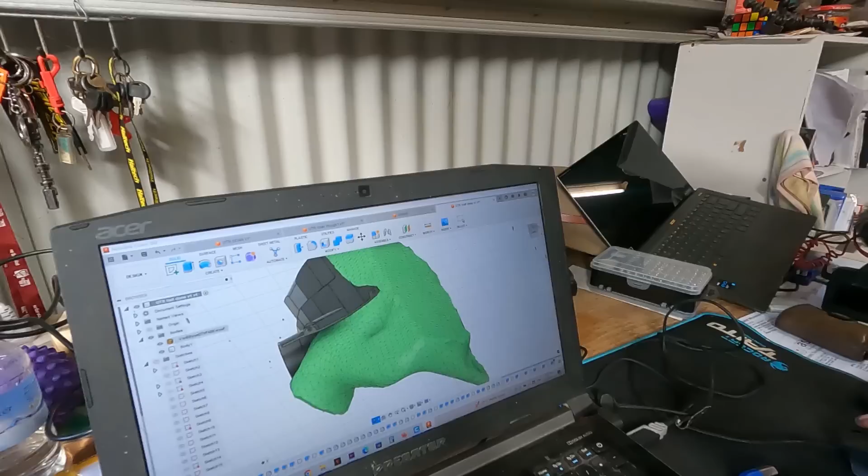I'm pretty excited, so I might just try and smooth these lines a bit and get this a bit more of a rounder shape. But overall, considering that I'm self-taught on this program and haven't been using it for very long, and admittedly I'm not very good at it, I'm pretty impressed with the fact that I've been able to do this. So it's exciting stuff.

So anyway, we'll get this sorted, slice it, and get it in the print. See how it goes. I must say that my poor old computer is absolutely not coping with trying to do this sort of scale of 3D design work. The poor old thing. Alright, so it's going to be a very long print, and this is only just for the one half of it.

We'll print half and see how it fits. As long as it looks like it's going to fit alright, it's pretty good. We'll have a chat to our boys down at Sunny Coast Makerspace and Clueless Creations that we've been working with for a lot of the HQ stuff, and we'll probably get them to print it out of something better suited than PLA. PLA for something moderately hot with a fair bit of suction going on probably isn't the best material, but for prototyping and getting it to fit, this is going to be sweet.

We'll talk to the boys about actually printing one properly out of some better material.

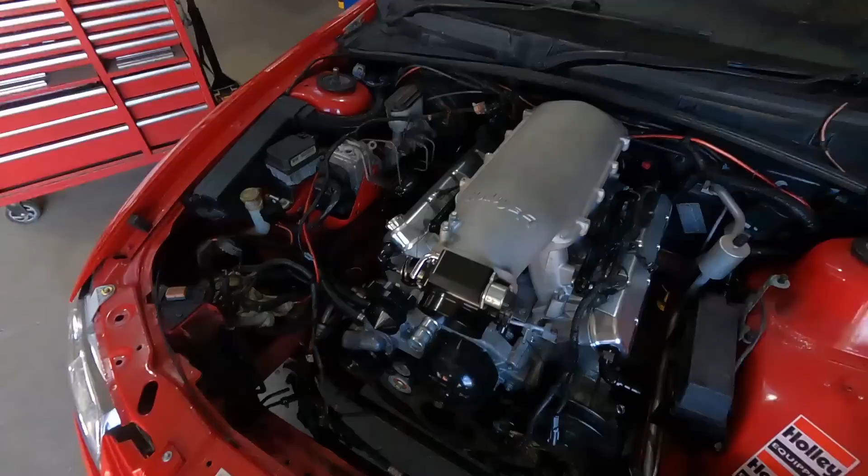While I spent most of my afternoon trying to sort out that OTR setup and get it started to print and 3D draw, a lot of time went by. The boys smashed along with this, and as you can see it's looking freaking awesome. But we're going to have to get the throttle cable and cruise control cable for the throttle relaxer extended, because they don't reach due to the high rise, so that's something we'll have to look at doing.

Just the throttle cable? The throttle relaxer stays where it is, it's just the throttle cable. Well, it's got to get sent away to get modified anyway, so that's going to cause a bit of a delay for us.

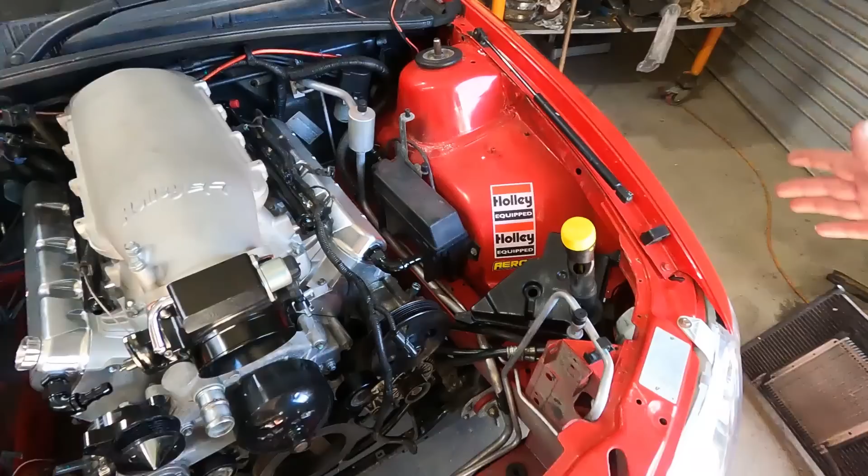As you can see, we've got our V6 overflow bottle to suit the VZ setup, because we no longer have a recovery tank. The overflow bottle goes down underneath the inner guard there and pokes up, all nice and hidden, to suit all the VZ stuff. But yeah, she's coming along, smashing through.

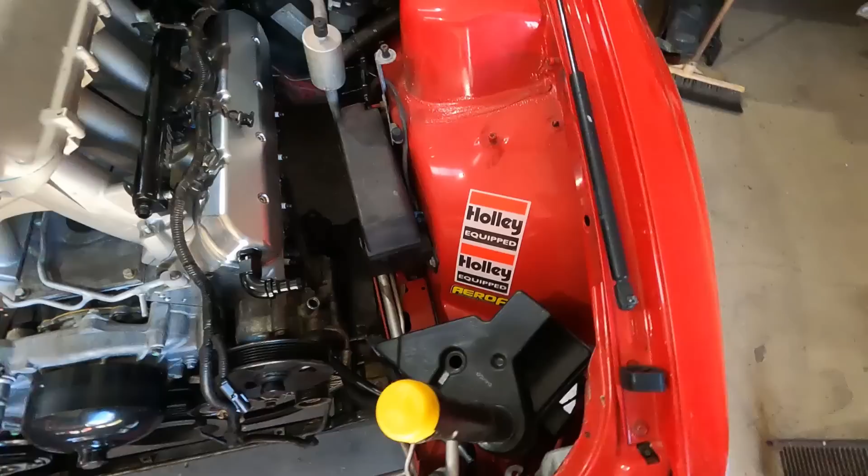Rec's going to remake this crossover fuel line that came with it. It did come with one but we weren't very happy with it. I hate it, yeah I really hate it. The way a lot of the stuff for this engine came, and the way a lot of things happened with this engine and how it came to us, we weren't very happy with, so that's something that's getting remade.

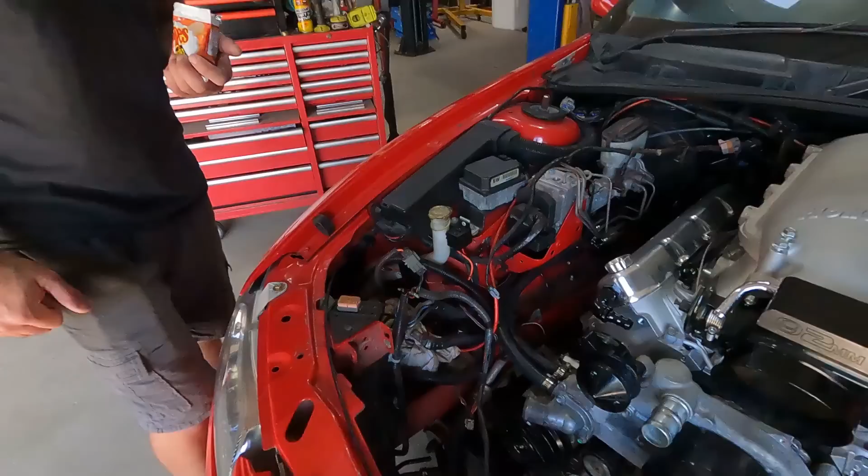So we've got to remake that crossover. My next job is to rejig this wiring to suit the VZ fans, because they're a different plug, slightly different setup. As you can see though, someone has already had a good crack at it. Yeah, done whatever - anyway, in the bin with a lot of it, stud. It's terrible.

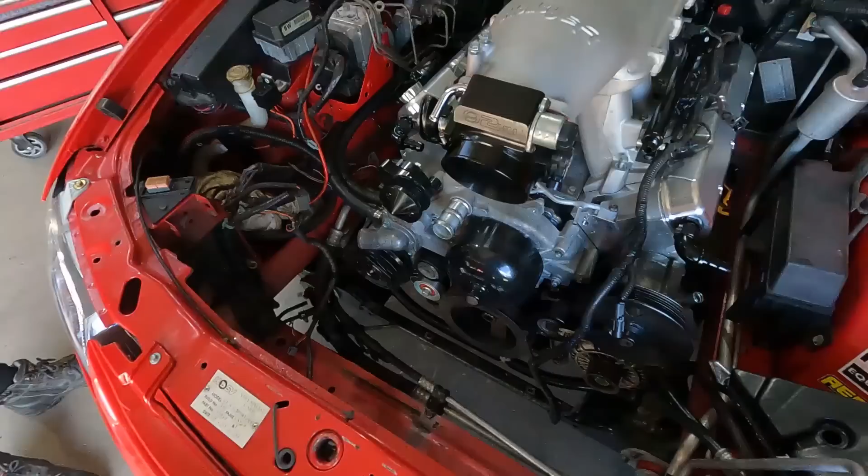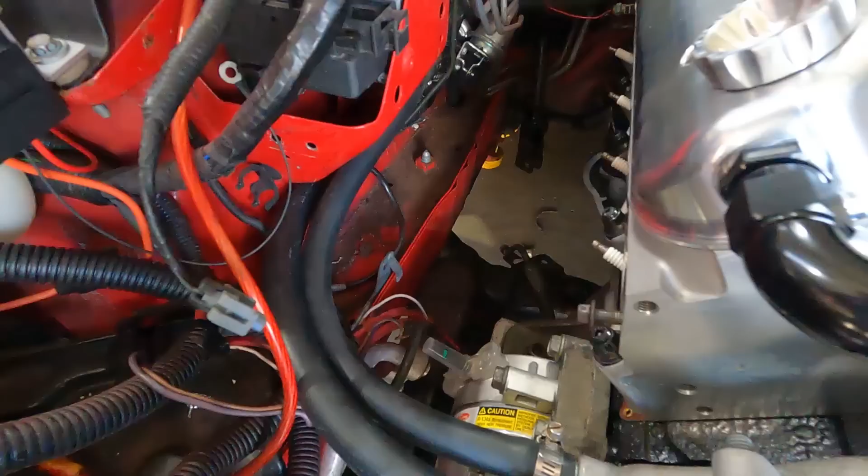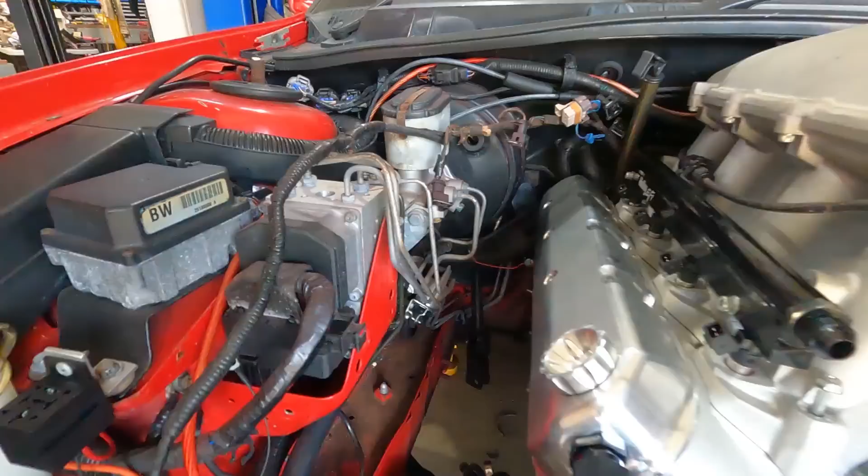Have you decided where you're going to mount the coil packs yet? Yeah, they're mounted. Where are they? Down there, probably really hard to see now, near the engineer. I don't even know where you pointed. You've got the chicken crimpy. That's all I can see. Follow the chicken crimpy though - it's up under here, touching a coil right now. Oh yeah, I see, chicken crimpy, oh yeah, coil, down underneath that heater tap. And then there's... oh yeah, over there. I see, nice, so that's where the coils are remote mounted. So yeah, hidden coils, yeehaw, it's all coming along.

Anyway guys, I think that's enough for an episode. I was just going to do this whole car as one big episode, but so much has happened since it started, it's turned into a really big episode. I think this video on its own is probably going to already be super duper long, and there's still so much to cover and get done, especially now we're doing custom stuff for it as well.